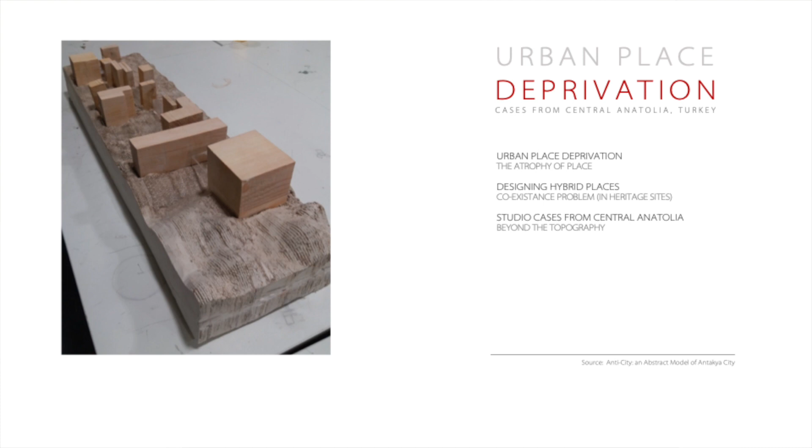Unfortunately, two years after this model was made, the Antakya region was torn down and atrophied by a devastating earthquake.

Urban atrophy points us to the places that need care. Not only earthquakes, migration, war, and pandemics, but also urbanization itself creates anti-places that need to be redesigned. The purposefully made anti-places absorb the significance of the surroundings that coexisted with them. While urban place deprivation is the main motive behind this design behavior, not every artifact has to be a place. In turn, anti-places are actually potential places for urban design projects.

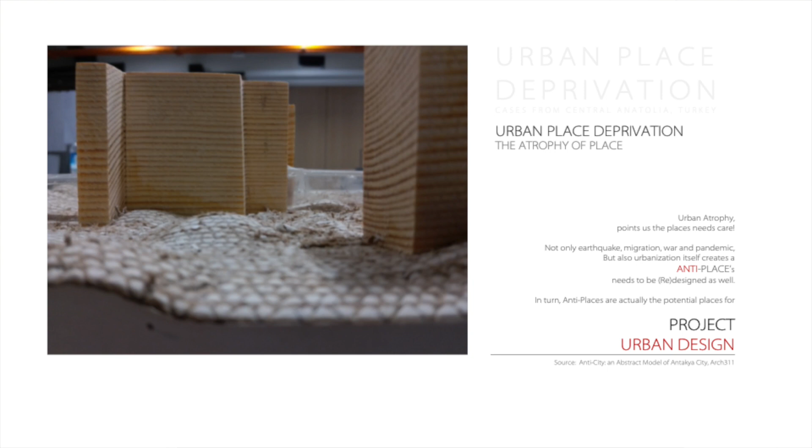Sometimes design fails to solve problems. It fails because there are no alternatives left behind. Building drains the potential environment.

In his artwork, Ahmet Doğu İpek reflects the philosophy behind our motivation. He repeats dark cities and dark moods in his works, in which he depicts giant buildings, giant masses which are the new owners of the cities we live in. This leaves a dystopian effect on one hand, and on the other hand, opens the door to a hopeful future.

The hybrid coexistence cultivates the character of places by creating atrophy. The earliest stages of the studio were composed on this theoretical framework. After the theoretical introduction, the studio works focus on rethinking local building strategies, explored under four modes corresponding to the atrophied feature of place.

Now let me define the most common cases one by one, giving some sample scenes. Spatial symbolic atrophy is a spatial or symbolic loss in features of place that may be shifted or atrophied. The simplest form of spatial atrophy is abandonment—abandonment of buildings and settlements for a reason.

Then anthropological shifts in urban design come next, such as gigantism, miniaturization, or futurization. Cookie-cuttered buildings might be the most common design disease, because of feeding the benefits of a construction-based economy and de facto expectations of so-called comfort and a comfortable life. So it produces boring cookie-cutter urbanism and an urban environment with sameness. Also cloning, duplication, and fake iconic settlement strategies for place marketing are usually to be seen in almost any district.

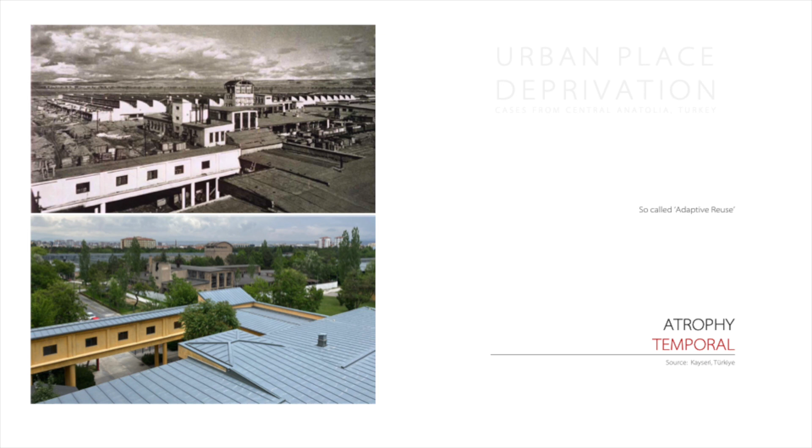The place where we made the studio works is somehow a similar settlement. Abdullah Gül University campus is also an adaptive reuse project, settled in the place of Sümerbank textile factory established in the 1930s. Rather than a holistic transformation, different architects presented their so-called adaptive reuse attitude on various buildings on the campus.

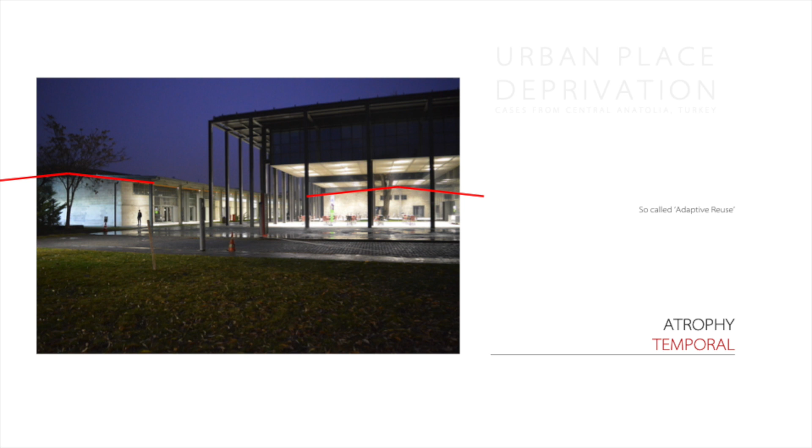For instance, you see two cotton warehouse buildings restored. One is designed for administrative units by dominating the historic warehouse. The other is transformed for academic activities with a conservative attitude. This is also another coexistence problem after the transformation.

The experience of a place can never be the same, just as stepping into the same river again is impossible. This is the most comprehensive form of place atrophy, covering context, meaning, and experience.

As the lived-in experiences evolve concerning the transformation of human and environment relationship, we are brought to a new level of consciousness for the environment in which we live.

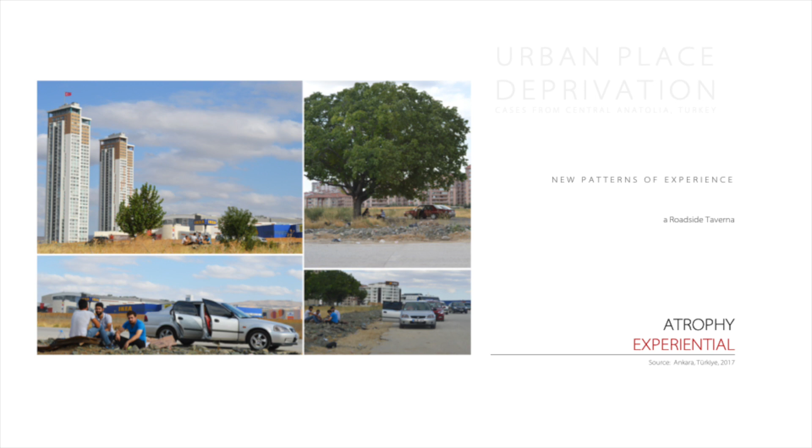The hybridity of place and anti-place is pregnant for new patterns of spatial experience, such as in the urban fringe. The experiential atrophy may sometimes result in new patterns of experience, such as a roadside that can be used as a tavern. The transformation of ontological features in urban formation is also counted as experiential atrophy, resulting in lost urban and architectural entities.

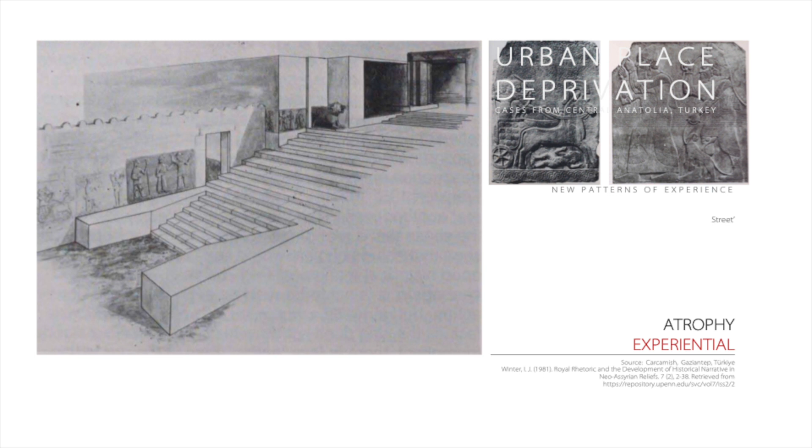For instance, the design and features of a public street have always been in transformation. Throughout this transformation, we lost an archaic urban design element called orthostat. Today, what we call streets are most likely designed between shopping malls rather than paved city centers.

Greco-Roman streets, modern boulevards, and American parkways all provide different experiences merged with the idea behind the street. Even though Marc Augé called malls non-places, such linear formations between malls are more likely to identify streets as the places of new behavioral patterns in urban design today.

After all, our concern in studio works is the rehabilitation and reformation of new life patterns in the contemporary urban context. For sure, we can also observe successful rehabilitation strategies, even gentrification carried out meticulously in some instances.

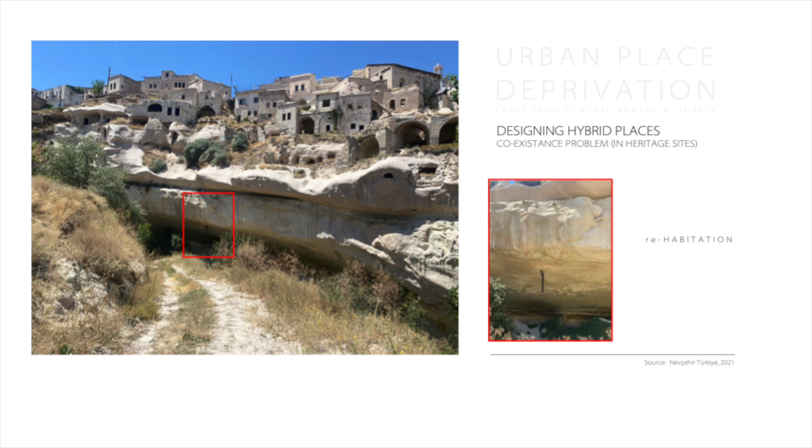Yet rehabilitation also brings hardcore technical adaptation problems in design, such as the sewage system. Particular architectonic reformations would sometimes create adaptive results, but if disturbing urbanism is the case, we are stuck most probably.

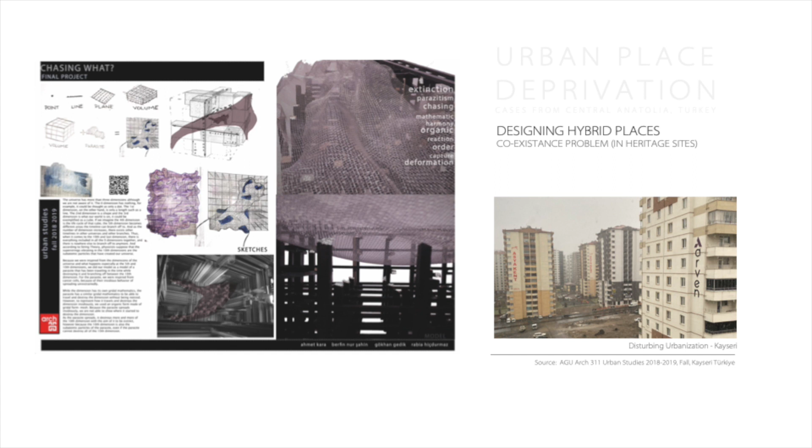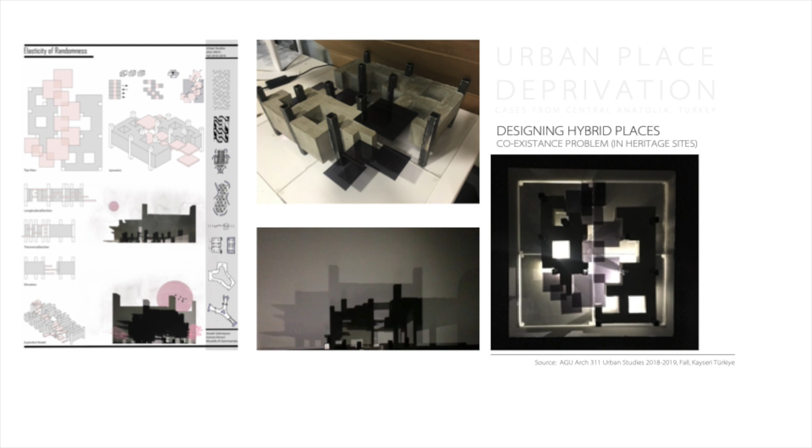This project is a third-year architectural student's trial to find out morphogenetic strategies on cookie-cutter urbanism, but could not pass the abstract stage. The actual cases in urbanism are much more complex than particular architectural problems waiting to be solved.

What if we can solve the distinctive morphological parameters in urbanism? We may find a chance to cultivate the morphogenetic character of the place and reproduce it. So this challenging attempt becomes our master design studio's objective, concentrated on rehabilitation and reformation of such places.

Apart from several unsuccessful attempts not able to pass the abstract stage, an attempt named geomorphism to generate solutions for disturbing urbanism does let us show the roots of the design strategies. Geomorphism is a design research attempted to sustain isomorphic structures together with the natural and/or built landform.

The field of study was an old settlement at Ağırnas, Kayseri. It is thought to be the birthplace of Mimar Sinan, Sinan the architect. The whole settlement area has also integrated with a halfway discovered underground city.

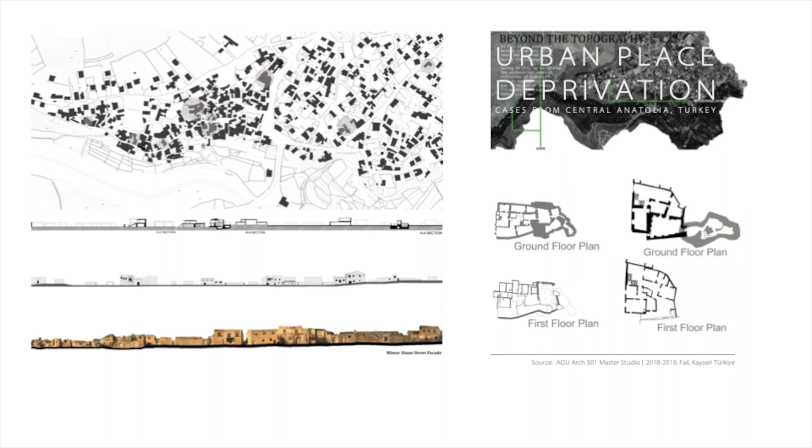To be honest, there are two distinct urban structures intertwined: an underground city and an above-ground city. Both possess different mappings and socio-spatial organizations, serving various purposes and being utilized by diverse ethnic groups throughout history. At first, we prefer to identify three layers of settlement, starting with caves.

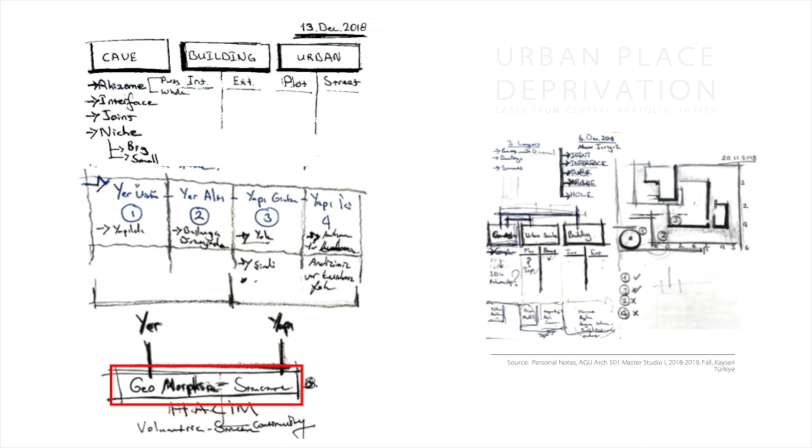First, the underground landform was designed to settle, then buildings were placed in front of caves, and then the new floors and urban patterns started to emerge upon the topography. Then, we discovered that the settlement morphology is transformed due to the vertically settled environment in three layers. There are underground formations and buildings on topography, but there is also a third layer providing a geomorphic interface in between them along the topography line.

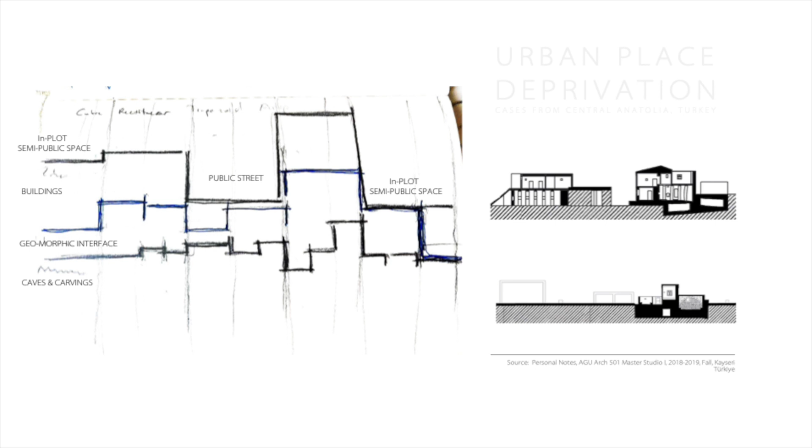Volumes transform when they go beyond the topography. The whole structure is like a geomorphic design indeed. Finally, we decided to separate this morphologic typology into four. The first layer is the deepest form of caves and carvings. The second layer is a geomorphic interface belonging from caves to buildings. The third layer is the buildings settled upon the topography. Then the secondary architectural formations are set up upon buildings as floors.

Even so, this division is not enough to comprehend the settlement morphology as well. We have distinctive patterns of settlements that cannot be explained with legal construction rules and legislations. For instance, sometimes this fourth layer is used as a semi-public passage extending beyond plots. These extended plots are distinctive ownership units constituting family complex plots. They have a kind of three-dimensional semi-private ownership between units. There are also in-plot semi-public streets and in-parcel semi-public spaces.

Let us start with caves and carvings in detail. Caves are like rhizomatic structures. They are the rooting settlements here. We achieve four distinct design elements named the rhizome, interface, joint, and niche, after making typomorphological analysis of the caves, depending on their volumes and placement strategies. Rhizome, interface, joint, and niche are the settlement strategies that will reflect themselves also in the above-ground urban form discovered in later stages. After the modulation of volumes, we reach 13 different rhizomatic structures.

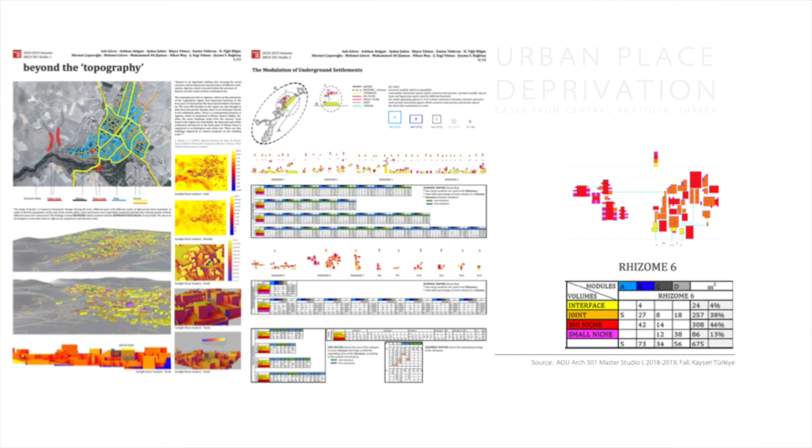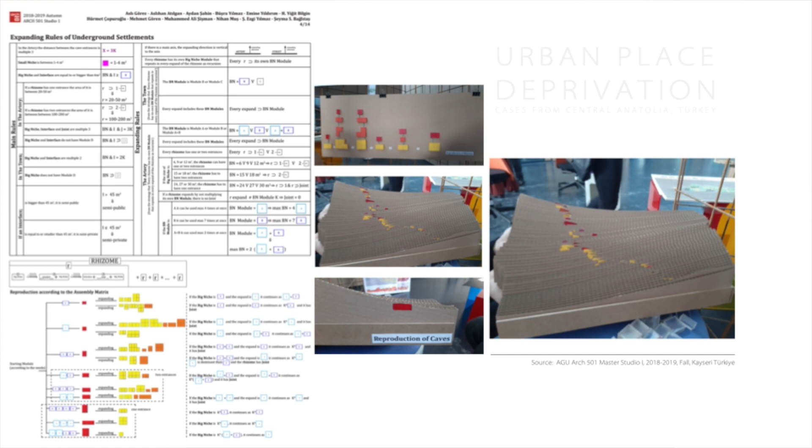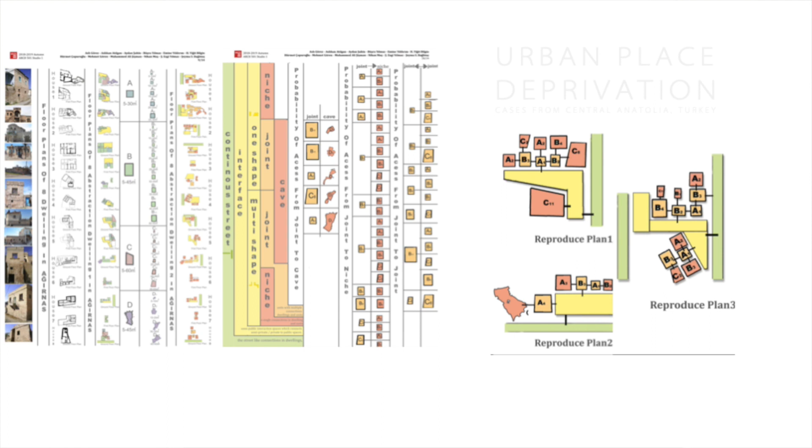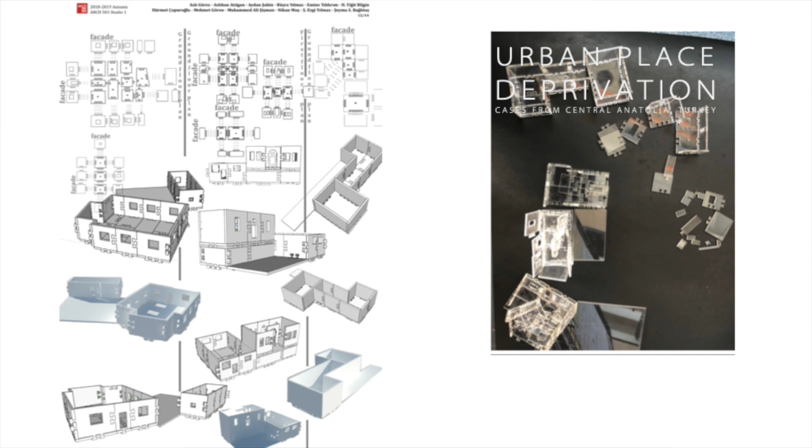If you see the whole geomorphic structure as a habitation, architectural units will constitute a rectangular gallery in form after the main cave gallery. Only the morphology has transformed, but the spatial composition was the same while the habitation grew from the ground. The typomorphology of building design strategies is analyzed from plans and facades separately, yet in search of the expanding strategy on facades, we are unable to find a distinctive rule set for it. The urban pattern is the final formation in the settlement area.

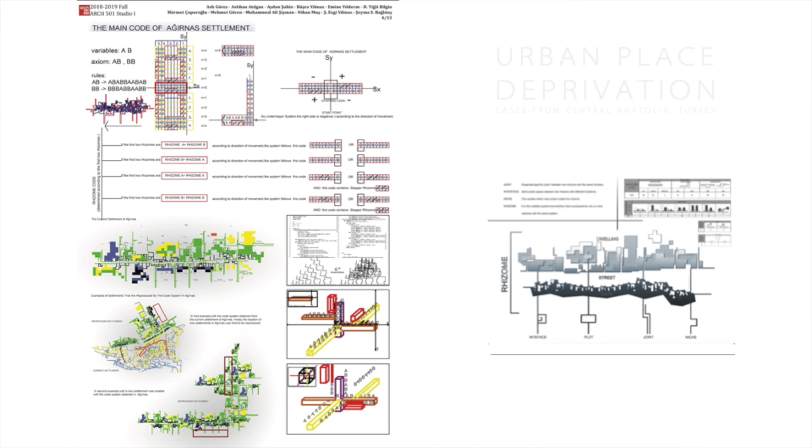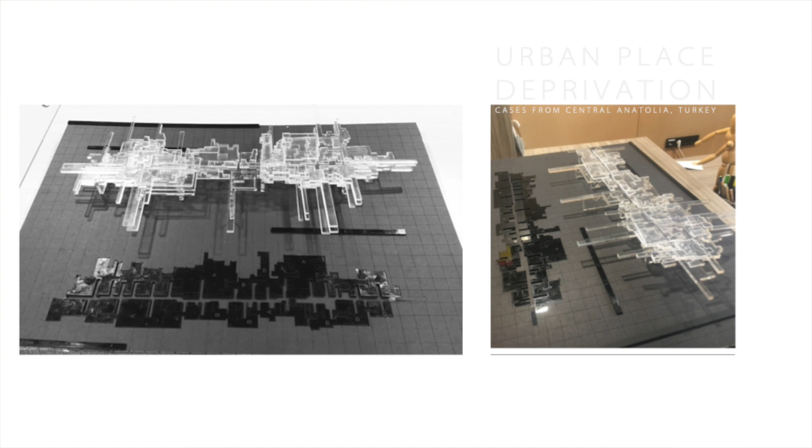Working on the streets and open spaces, we generated a prototypical model for Mimar Sinan Street and surrounding plots, assuming that there will be a logic behind this morphology. Also, it's expected for the second stage of the studio work to make speculative projects for the evolution of the habitation design to the following generations, which are not going to be presented here. You see the initial expanding strategies of street units here are unable to be applied as organically as the field. It remained quite prototypical. However, achieving two-dimensional and three-dimensional prototypical models representing the settlement codes was productive for the upcoming stages of the studio. Also, the same prototype is generated for plots and parcels, ready to be regenerated with the rule set defined under the current map shown with the red mark.

All in all, we have a distinctive design strategy under the philosophy of geomorphism, which is identified with four abstract stages as rhizome, joint, interface, and niche, coherent with the morphogenetic heritage of the existing artifacts. So, reproducing the design strategy is an attempt at sustainable urban design in Central Anatolia. Also, instead of stereotypical urban design projects, the characteristic settlement in Central Anatolia evolves through ontologic metamorphosis, articulates, accumulates, and grows through relatively organic progress.